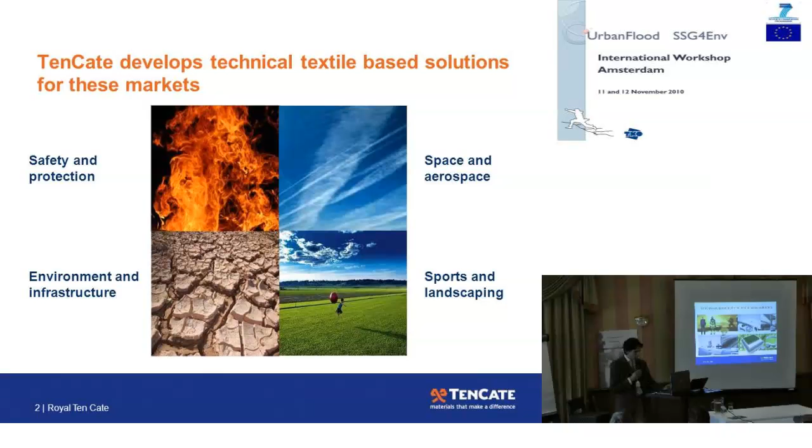So it is the first presentation concerning the sensing part of this big network solution, and we will present what is possible to do with optical fiber measurement. Before starting deeply, I will introduce our both companies. So TenCate, perhaps some of you know, we are a producer of technical textile in different fields of application, especially safety, space, sports and landscaping, and also everything related to infrastructure and environment. In fact, the part which corresponds to this sensing solution comes from this infrastructure part.

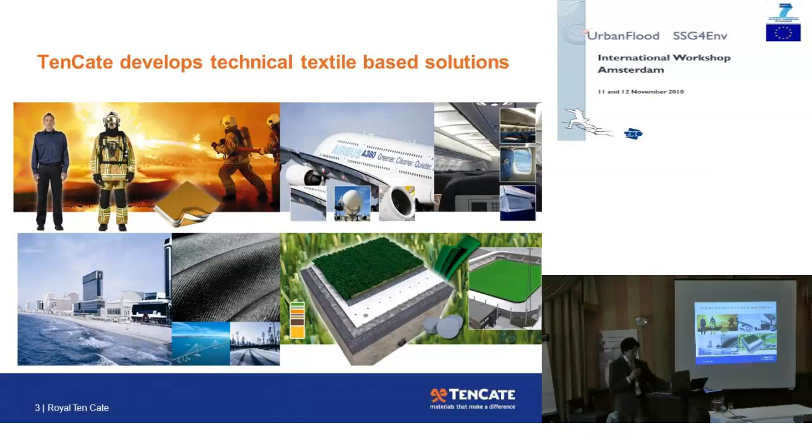I leave it to Patrick. Okay, nice to meet you. Now I'm going to introduce the company I represent, which is a startup. We are introducing innovations which are aimed at managing erosion risk, because unlike some people around may not know, more than 80% of dam failures are not due to mechanical instabilities. They are due to internal erosion, processes which are in progress within the dike, which have no signature on the surface. What we are doing is assessing the vulnerability to erosion via new erosion tests, which enable a first quantitative estimate of the vulnerability to erosion of a given embankment.

And we are also working, and this is why it will be the topic of this presentation, on the detection of early signs of erosion via fiber optic surveillance. This means that we dig within the structure a fiber optic cable, which is linked to a position near the dike, and via internet or any other reliable telemetric system, we can have an assessment of what is happening within the dike.

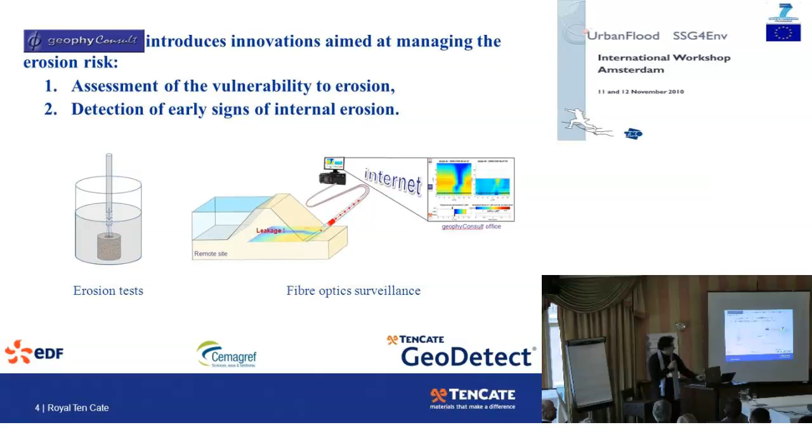As you may know, there are many needs to monitor earthworks, because they are very sensitive structures. They are subject to meteorological events. Of course, it is also requested to have an optimization of these structures. And during construction, it is very important for many practical aspects to have a follow-up of the structures.

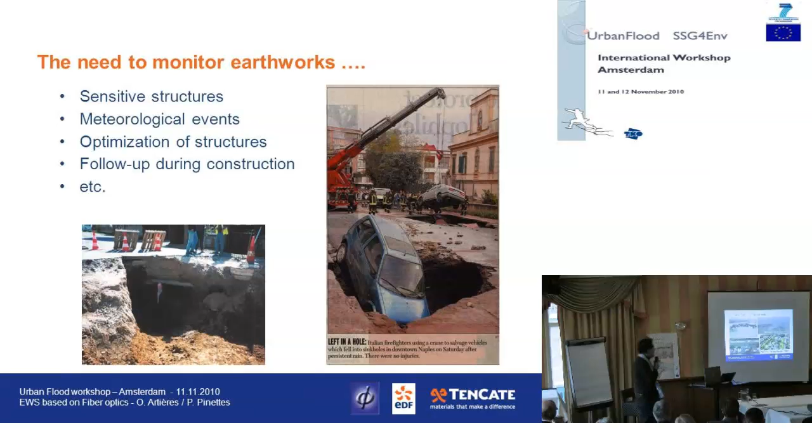But it is not limited to standard earthworks. It can be applied also to hydraulic works, especially because of floods, which is something very important here. As you can see, there are many floods - of course the last one in Wilnis in the Netherlands, but also in America, in France, or in any places all around the world.

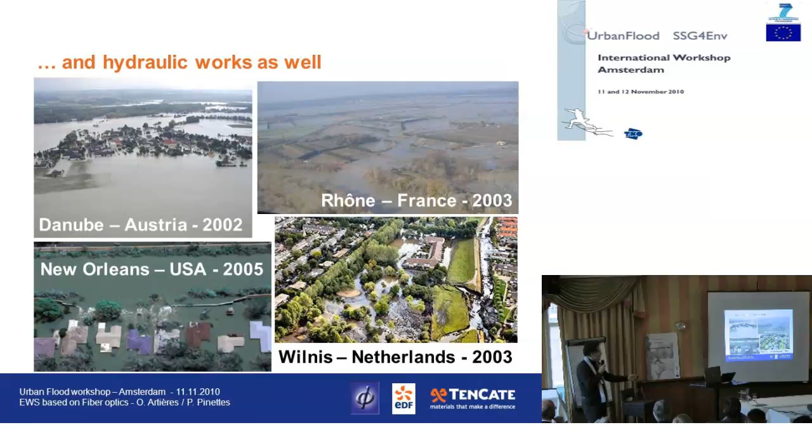As you may know, generally, how do we manage the risk, the safety of those structures? We manage them via two things. First, the structure, which is supposed to be designed so as not to break, but in case it breaks, in case the defense barriers have a problem, we have to monitor what is going on within the structure. And it turns out that the conventional monitoring methods, like telemetered piezometers, electric gauges, etc., are generally very complex, and hence they are not very reliable over very long periods of time.

For a dam owner, he's not talking about years, he's talking about decades. He wants his system to be reliable for 20, 50 years. And over 50 years, if you have an array of sensors, then the reliability as well as the maintenance cost is something which will be considered as very, very important by the dam owner who pays. And the conventional methods generally are not adapted to that.

Therefore, besides, it happens that sometimes the other conventional surveillance methods, especially visual inspections, turn out not to be able to detect internal erosions that were in progress within the dike, but when we could see that they were occurring, it was too late to secure the dike. Therefore, the disaster could not be prevented. Besides, some dikes should have water tightness because of economical reasons, like for instance dikes for water supply.

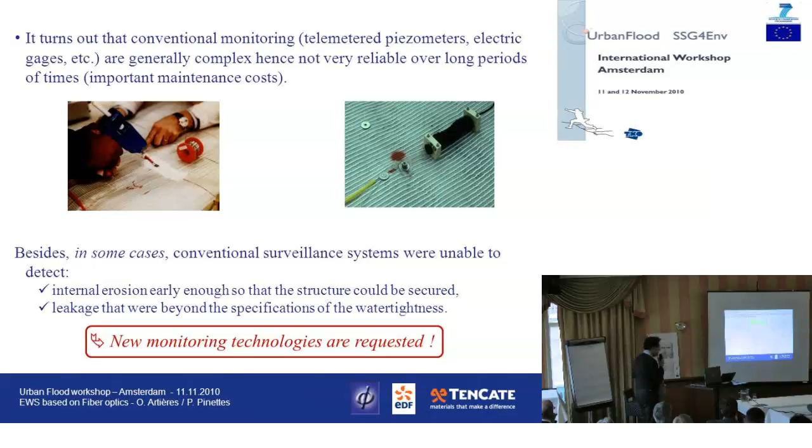It turns out that it is very difficult to ensure that leakages are actually within the specifications of water tightness. So there is a need for new monitoring technologies within dikes, and there is one parameter which has not been mentioned up to now, which is the temperature.

Temperature has been known as a very good indicator of leakage within embankment structures for a very long time. We generally have piezometers, and if we make a thermal profile, we know it is a very good indicator of leakages like the one depicted here.

The fact is that temperature can be very easily measured by a fiber optic. If you have a fiber optic, you send within it an optical signal. As you know, for telecommunications, this optical signal, 99% or more, is transferred without any reflection. However, there is a very small part of this signal which is reflected each time it sees an atom.

This very small part of the optical signal is reflected according to the local temperature around the atom as well as the strain around it. If we have a system with electronics able to measure the reflected signal and the time at which it comes, it can locate where it happens, giving a very cheap, very reliable way of measuring temperature within the dike around the fiber optics.

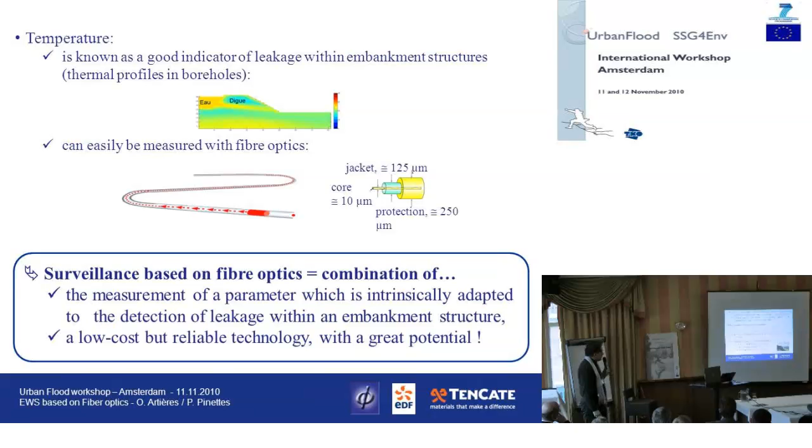If you go into more detail, the kind of precision we can get is a measurement every 10 minutes, with an accuracy in space of 1 meter, and an accuracy in temperature of around 0.1 Celsius degrees.

As I pointed out, it can be installed anywhere. You have to dig it in, you can put it within the structure without destroying it. It is very low cost, it is passive, meaning there is no long-term drift, no sensitivity to electromagnetic or radioactive noise. This is why it is also used in nuclear power plants, and it can easily be combined with other products like the geotextiles my colleague will talk about later. It's also very stable over several years.

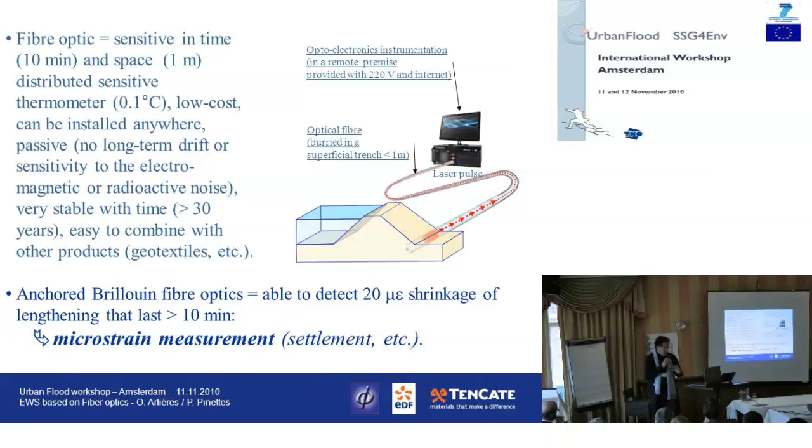In case you use another optical phenomenon, you can also measure the strain, as I mentioned before, with an accuracy of about 20 microstrains. So it can be used for settlement measurements, passive settlement measurements.

Now if we go into more detail, how can we use temperature to detect leakage? When you have a leakage, you change the thermal regime, going from a conduction regime, which is well known in physics, to convection and advection. This thermal regime change can be very easily detected with automated algorithms, which is why we use this change to detect leakages as soon as they initiate within the structure.

The next step is how we position the fiber optics. It depends on the structure. For instance, with a zoned dam with water tightness, we try to install it below the water tightness if possible, or we can install it on the raised berm, depending on the structure. It's very important because the access radius of the fiber optic will intercept any leakage within around 1 meter around it, and with this we can detect anomalies of the order of 0.1 Celsius degree over 1 meter every 10 minutes.

Our return on experience on actual structures, real structures with EDF, is that we can detect leakages that can be as little as 0.2 liter per minute per meter when positioned on a drained upstream facing, and of the order of 1 liter per minute per meter when installed on a downstream facing.

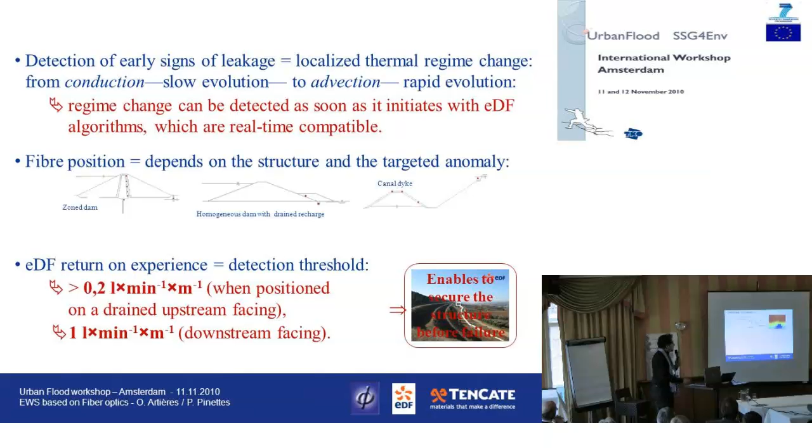Which means that for most of the erosion risk, it enables us to secure the structure before failure, unlike all the other methods.

So if you want an idea of what kind of signals you will get, here for instance is a leakage. You will have here your optical fiber, which will intercept it. And you have here the time, which progresses over time, and here the distance. At the beginning you have nothing until a thermal anomaly occurs, and therefore you can locate it in time and in space.

And with deformation it's exactly the same. You will also locate it in time. It occurs at that time, and in space you have an anomaly here as well as there.

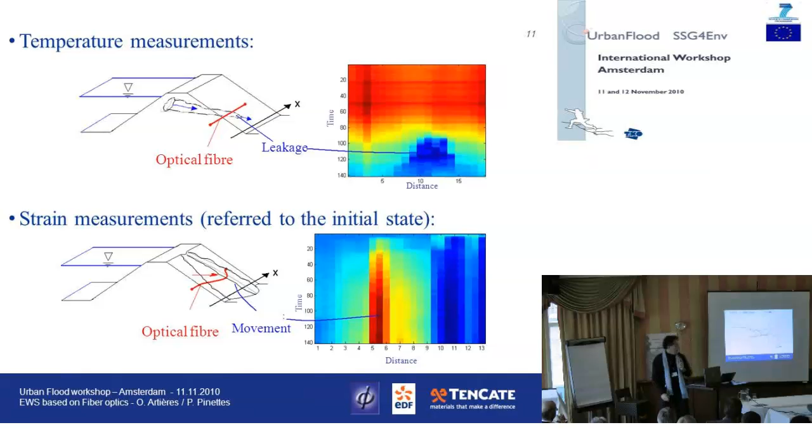I was presenting you the raw data. We can also work on more complex data with more advanced data analysis systems, and then we can create precursors and locate them in space - here it's a picture at a given time. So with this, as you will see at the end, we are able to have leakage precursor detection as well as monitoring of the evolution of the anomaly in space and in time.

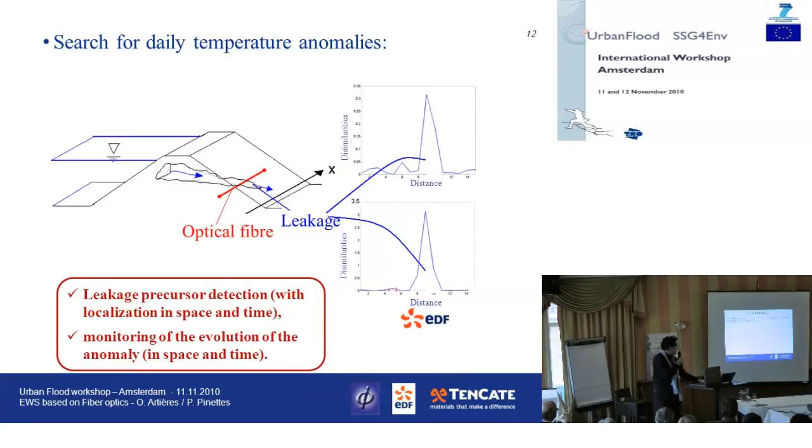So in summary, those fiber optic systems are able to prevent or at least drastically reduce the risk linked with internal erosion. We can also use another technology combined with heating around the fiber optics, which gives us access to the leakage flow rate. However, then the access radius is reduced from 1 meter to about 15 centimeters.

Of course, and it's very important here for urban flood, it can be connected to the internet via a basic PC, so it enables automated alerts and alarms. It can also be used for repeated measurements. So in case a dam owner has a period where he needs to reduce his running costs, the investment, which is very low, has already been paid and is still active.

The only limits are the following: the system, the instrumentation, cannot go beyond 30 kilometers, so it means you need one investment per each 30 kilometer span. And if we want to reach the detection threshold I mentioned before, it requires detailed design and advanced data analysis, which means it demands real skills.

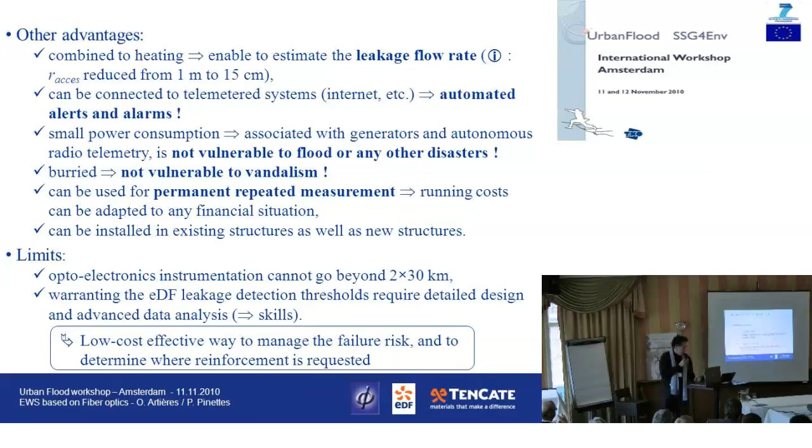From this background, we have developed a solution mainly for geotechnical application and hydraulic construction, which is a combination of a structural barrier, so a filtration geotextile which prevents soil erosion, internal erosion, combined with a monitoring barrier based on sensors and optical fiber sensors.

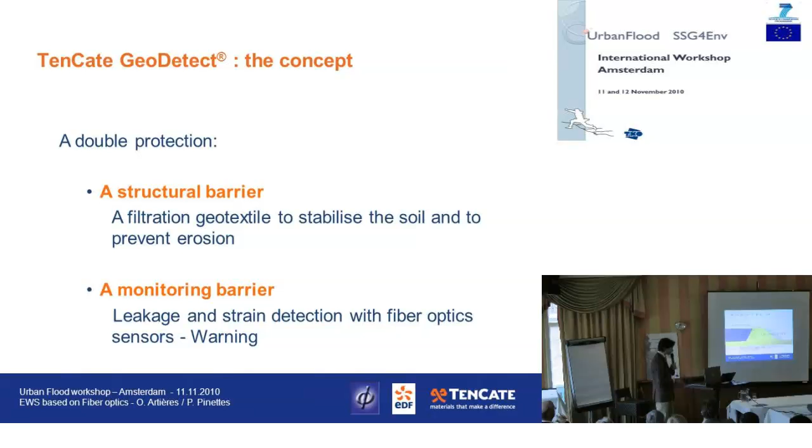So the principle is the following: on this textile, which is commonly used to prevent erosion, we embed several optical lines which are able to detect a leakage, a strain, or an abnormal deformation in the dike.

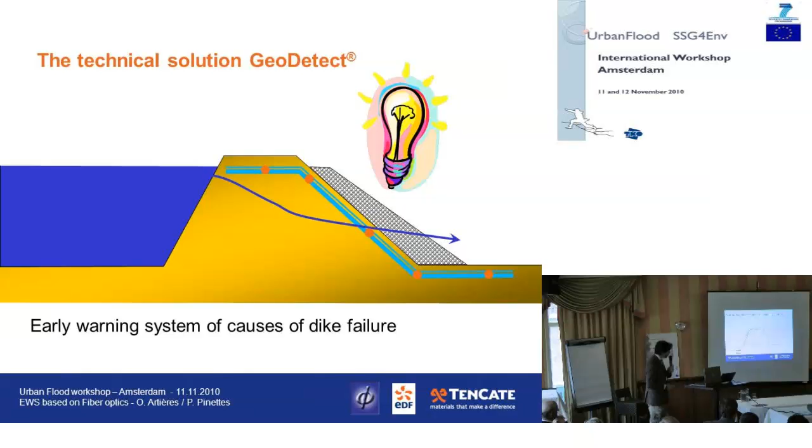So there are two different possible measurements: either stability control to detect slippage or settlement of the dike, or the possibility to detect a water channel.

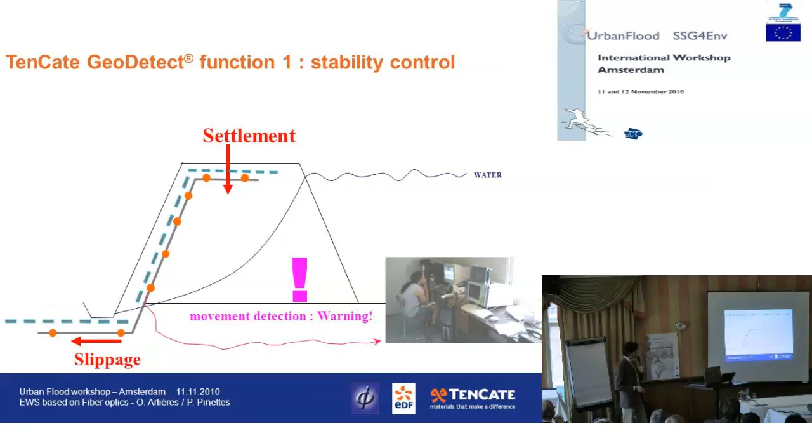The product is, in fact, the combination, as you can see - and there are other samples on the table at the exhibition room later - of optical cable on a textile, which gives several advantages.

First of all, of course, we can embed several optical lines and make multi-parameter measurements, strain and temperature at the same time, which creates a big advantage due to the fact that the textile has a good friction interface with the soil.

And with this very good friction interface, we can detect very small strain from the soil and are able to detect small movements of the structure.

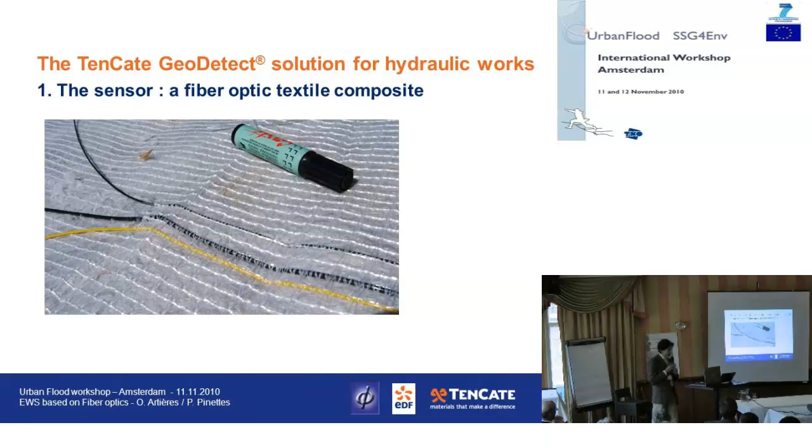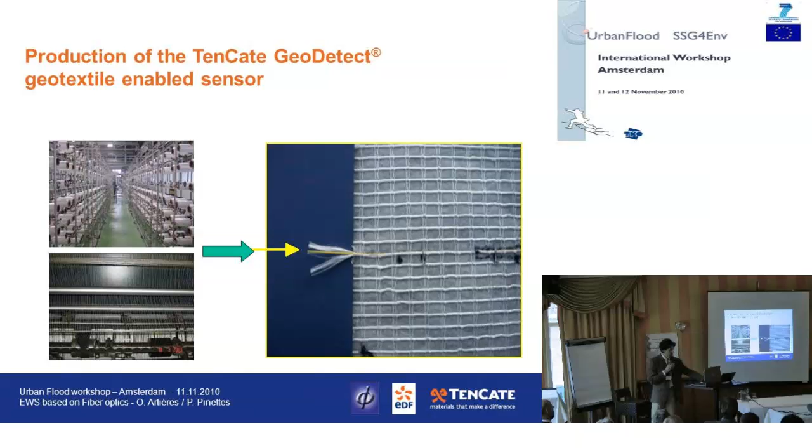Of course, all the textile functions - drainage, filtration, and reinforcement - can also be used in this solution. So in fact, the sensor system is produced inline, combining both optical fiber and textile at the same time, and it is presented as a roll, like that.

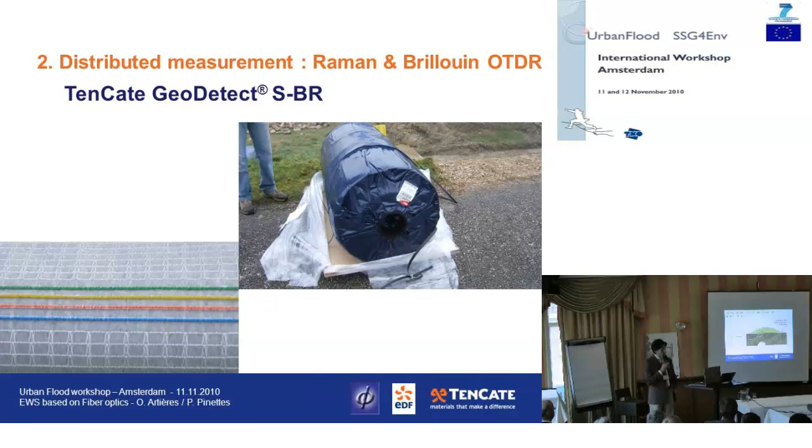This development started a long time ago, in 2002, when we wanted to reinforce and detect cavities in subsoil under infrastructure, for example railways, roads, and so on. So by reinforcing, of course, if a settlement or a cavity occurs, we are not able to see it from outside, but due to the fact that the geotextile with the reinforcement function embeds optical fiber, this can create a warning to the control room so that something happened in this area.

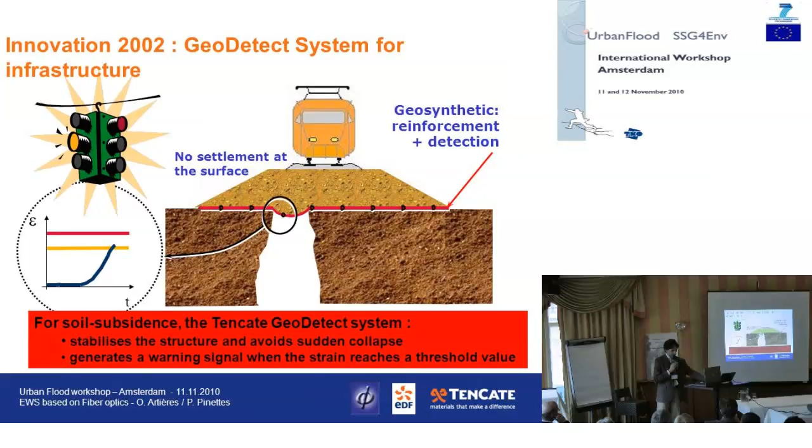This solution was used in 2004 in several sites. We have either a bridge abutment reinforced with textile over a river, or a railway line over cavities. And it has been working very well since this period.

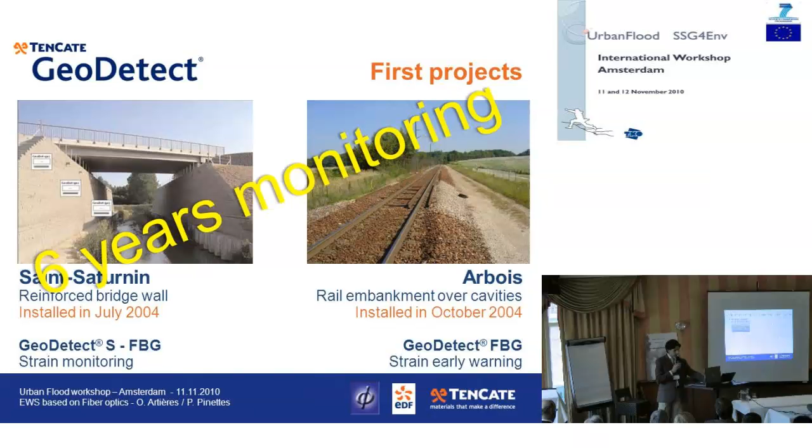The TenCate GeoDetect solution is of course the sensor with the related optical interrogator, which can be different depending on the parameter measured, either temperature or strain, and it is the measure and the data analysis. The main purpose is early detection and localization. As Patrick said, we can localize the event at 1 meter space resolution, which is very precise when you think of the tens of kilometers of measurement.

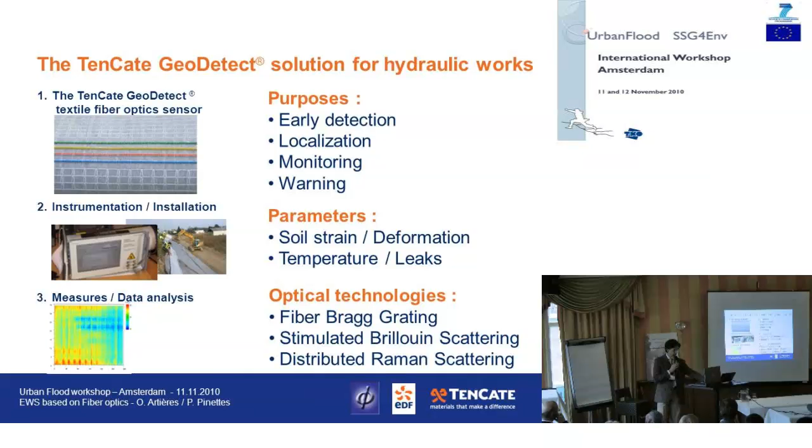And of course, we can create either a warning or simple monitoring of the work. We detect either strain or temperature. Temperature is for leak detection, and we can use different types of technologies. I can present now some examples of this solution.

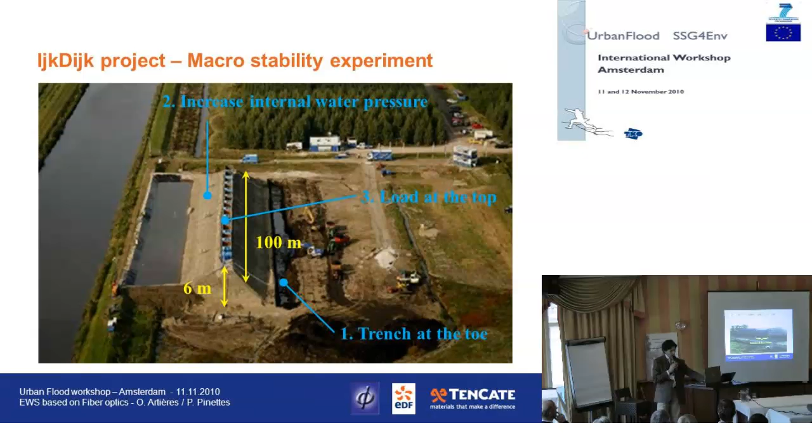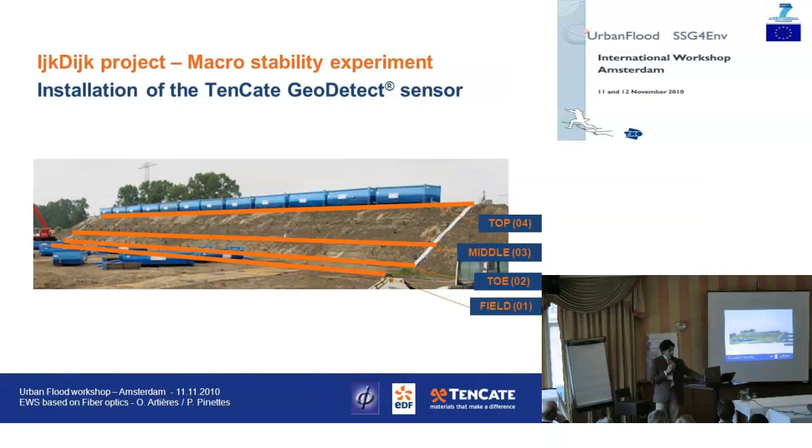We already spoke of the IjkDijk project, so you will have some pictures again, of this first test in 2008 on macro stability, where we embedded and installed 4 strips of this material, lengthwise along the dike at different levels, and you can see pictures of the different installation stages of these strips.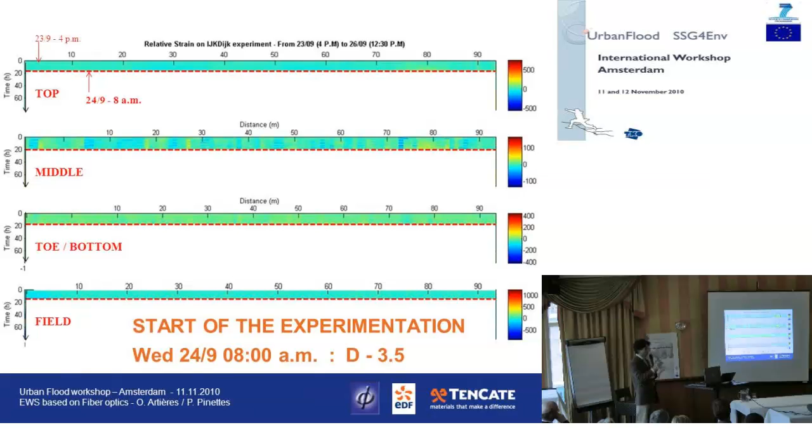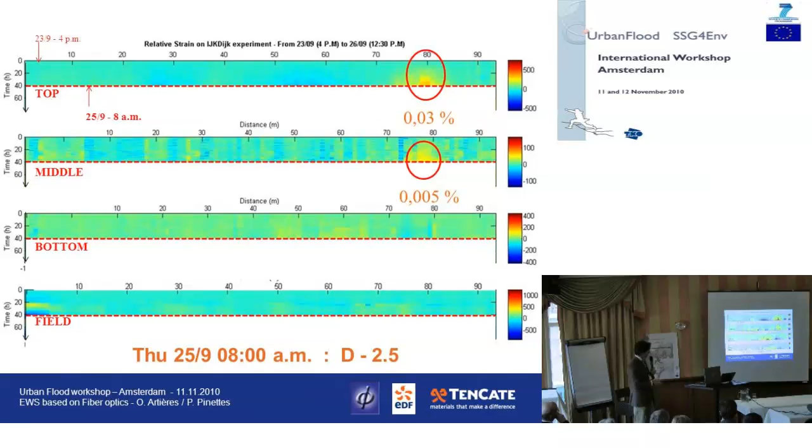We started the measurement on this date, the 23rd of September, and then the experimentation started. Here, 2.5 days before the dike collapse, we can already see some strain in the soil on the first two strips. As the hours pass, 2 days before failure, there is an increase of the strain, another strain area appearing on the dike, some compression zones here, and once again, 1 day before collapse, we can clearly see the movement of the soil of the dike, which corresponds exactly to what was observed when the dike failed 1 day later.

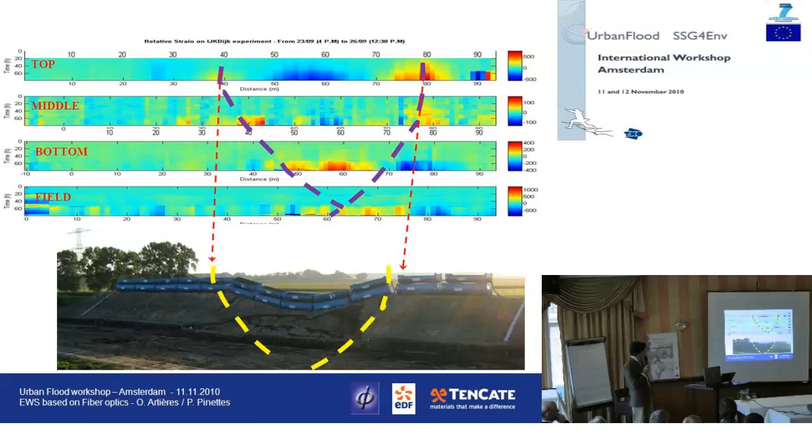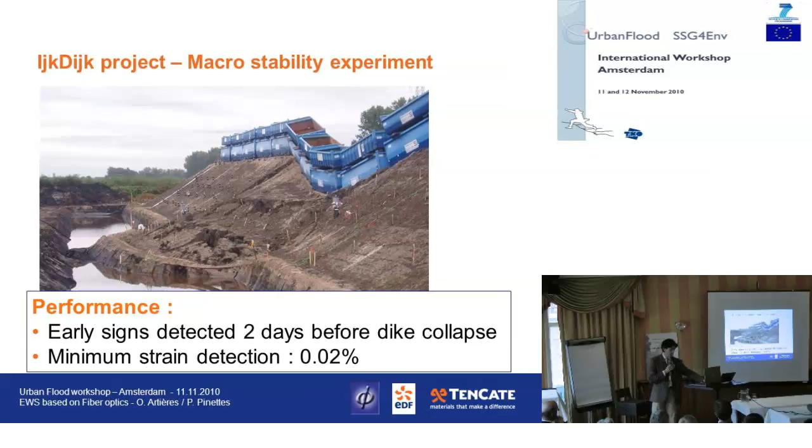So from this test, performance is 2-day detection before the dike collapse, with a resolution of strain that is very, very low due to this friction with the textile on the soil. It is 0.02%, which is very, very low.

Another project: this development started in 2004-2005, and we did an experimental basin at Cemagref in Aix-en-Provence, where we installed artificial leaks through the dike to control the leakage through the dike and to have a better estimation of the minimum resolution and performance of this sensor.

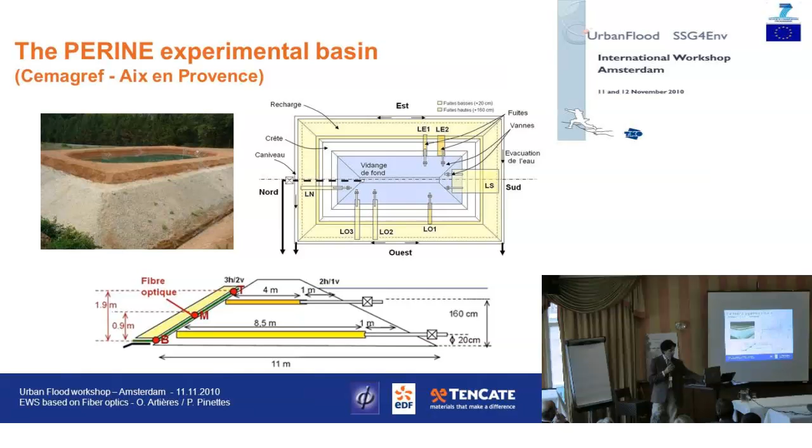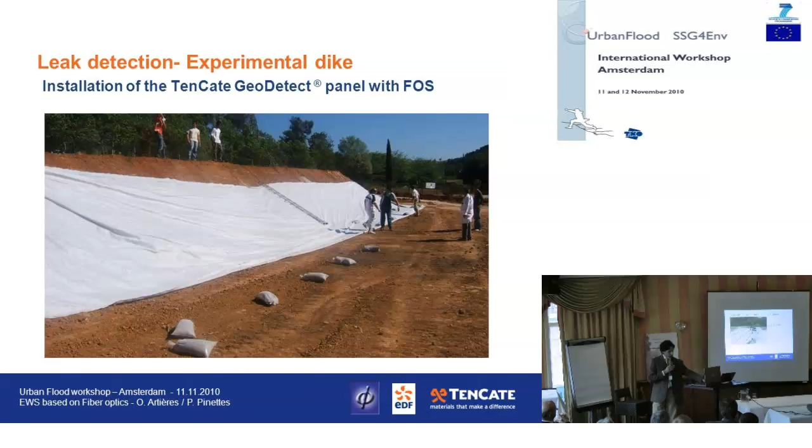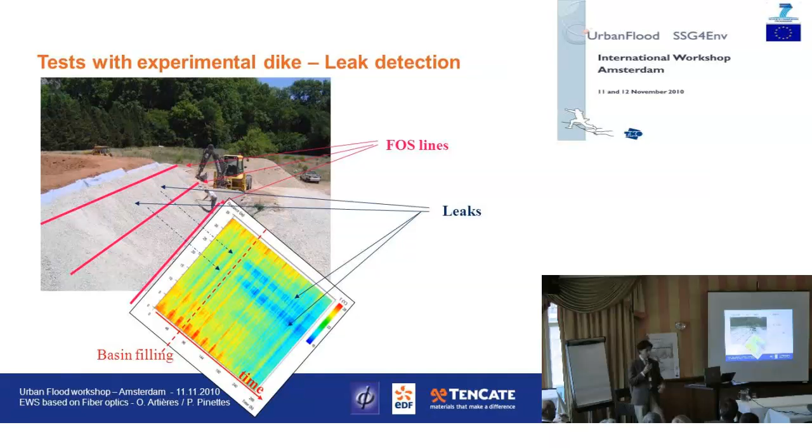Here is the installation of this panel with optical fibers. The fibers are installed here, and we created artificial leaks behind it, and you can clearly see where the leaks appear. Here is the start of the basin fill, and you can see the change of temperature here due to the leaks. Of course, we can detect these leaks before they are visible from outside, and that is the purpose of this early detection phenomenon.

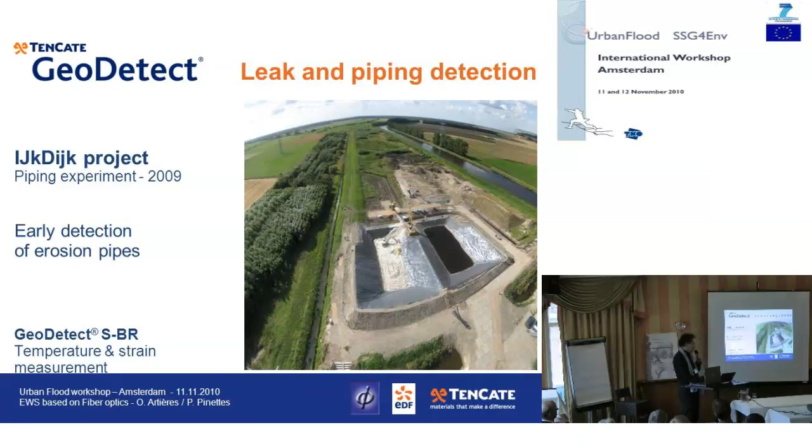And the last experimental site: now we are once again going to talk about the IJkDijk project, but this time on the piping experiments. There were 2 basins, and here were the experimental dikes, which were broken each time, broken in 4 experiments. Here is an image of a dike before it is ruptured. You have the water here, the experimental dike here, and the basin where the water could be recovered after failure.

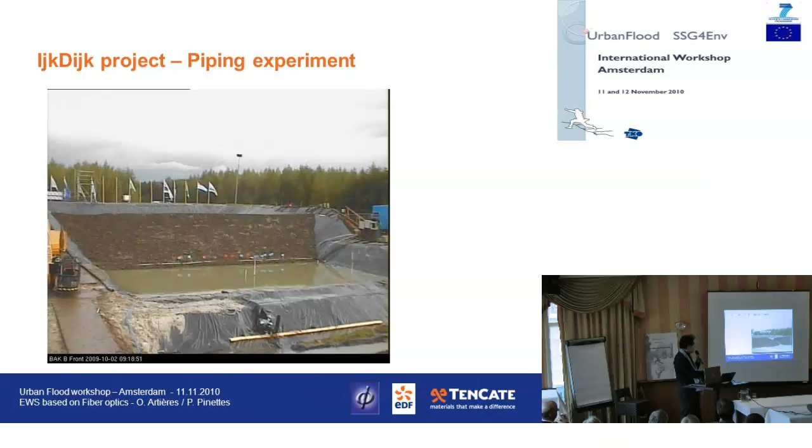So when it was failing, this was the kind of images we had, and we had the opportunity to install our system within the dike prior to their construction. At the interface of the sand and the clay, we installed 4 strips of different kinds of fiber optics, including the geodetect fiber optics.

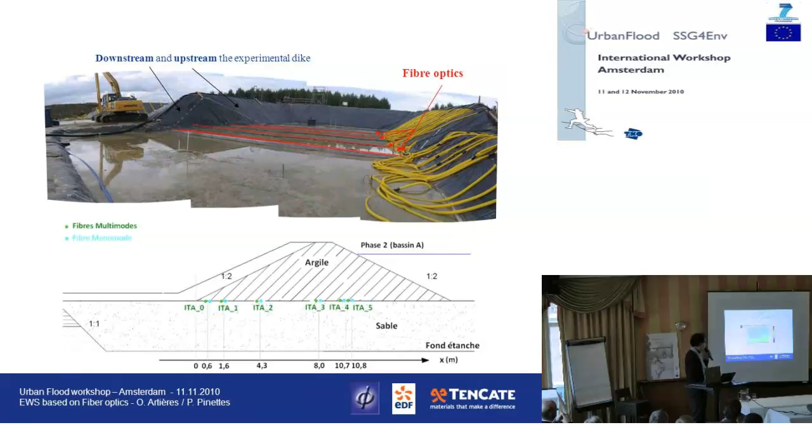What we did was measure the temperature over surfaces like this with time. I will show you the kind of images we will finally get. It's a movie which changes every hour or every 10 minutes, and you will see the evolution of the temperature with time.

And if you go to the end, for instance around here, you will see the leakage which is in progress while nothing is visible outside. With that kind of measurement, you can have precursors visible from 2 hours to several days in advance, before visual inspection could detect anything.

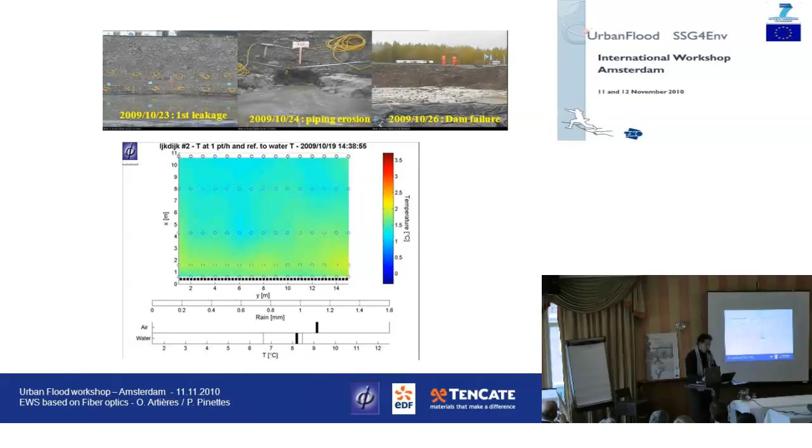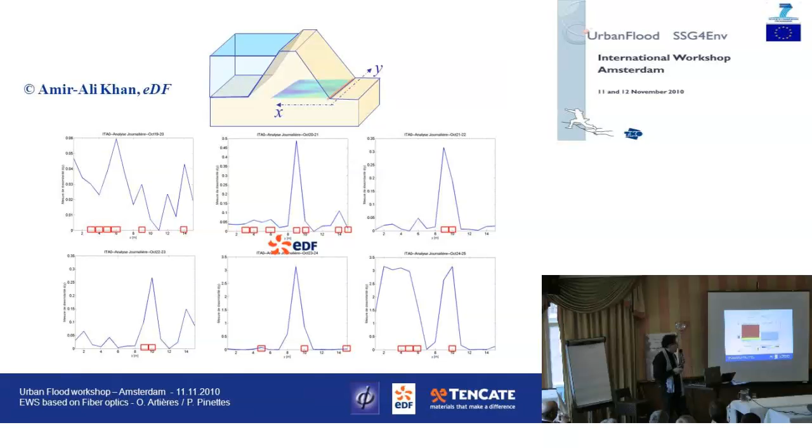The visual inspection or any other kind of surface sensors - if we apply the EDF algorithms to predict with more accuracy in time the precursors, we could locate them 4 days before the rupture, on an experiment which lasted no more than 5 days. So it means that with this kind of method, we are able to predict with high accuracy.

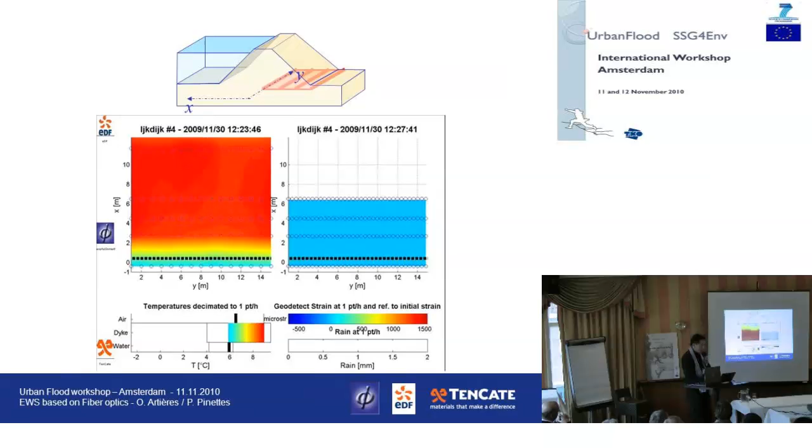We can do the same for other experiments where we have the temperature as well as, at the same place, the strain, and you will see the signature within the dike of both the temperature and the strain. So it is a tool which enables detection with high accuracy.

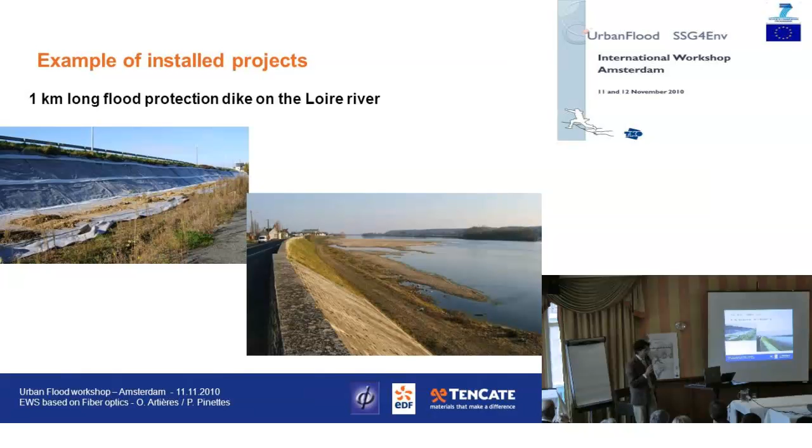Just before concluding, an example we have installed not only in experimental projects but in a real project: we have equipped a 1 kilometer dike along the Loire River, a flood protection dike, with this system.

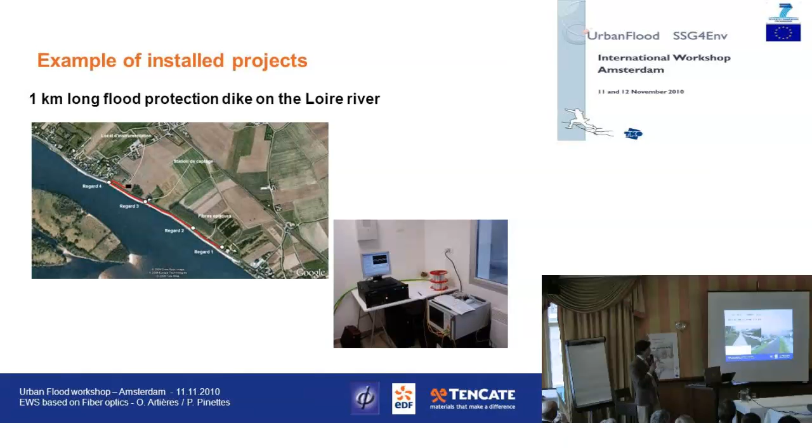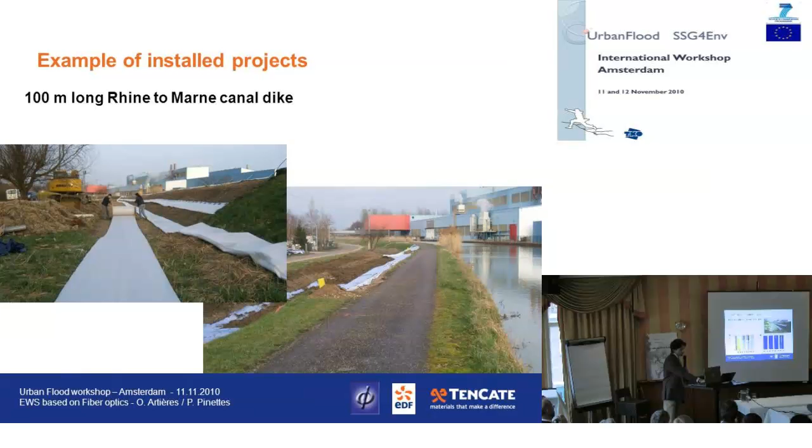Also a canal along the Marne and Rhine, 100 meters long, where this area was suspected to have a leakage, and we detected the place and location, and more or less quantified the amount of this leakage. Here you have the picture of the leakage detection.

Also, we have recently installed close to Amsterdam the so-called Volgermeer area, where the purpose was to measure the strain in this basin due to the filling.

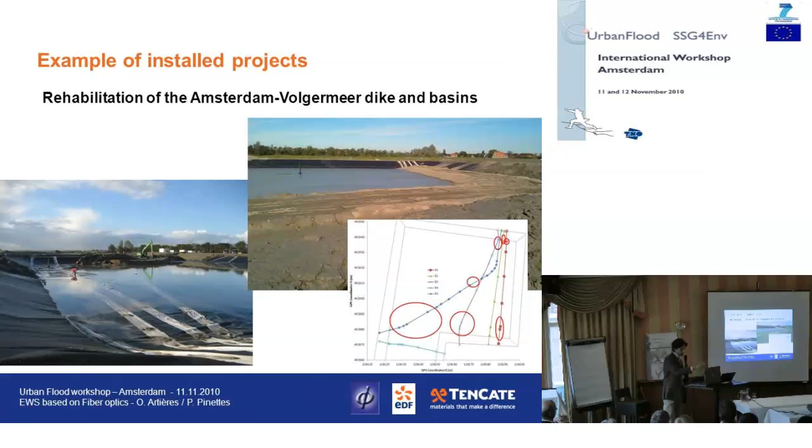And also, Patrick is currently conducting a study for the French waterways along the Rhine River, to study the implementation of optical fiber solutions on 38 kilometers of dikes.

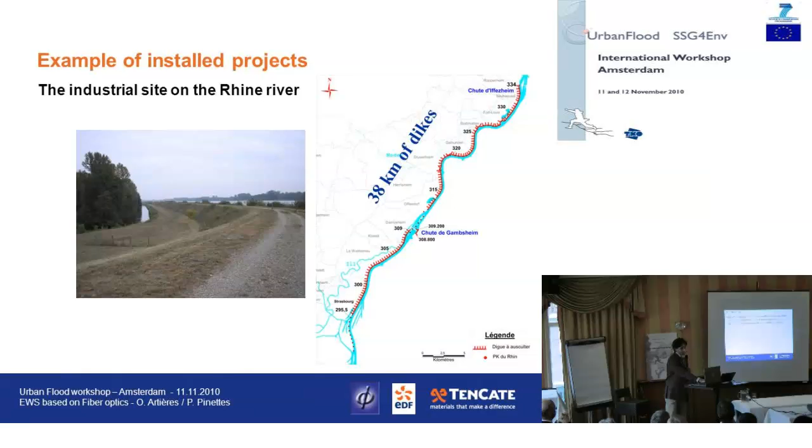So to conclude, you have seen that this early warning solution based on optical fiber is a very powerful solution. It can be automated for surveillance of dams and dikes. It can predict failure with very high accuracy in both space and time.

By combining with the textile, this enhances the power of the optical fiber solution, which can detect both strain and temperature at the same time. It is reliable, easy to install, durable, and can provide a multi-parameter solution. And when we apply a specific algorithm or modelization for data analysis, we can greatly enhance the early warning system. Thank you very much, and sorry for the little delay.